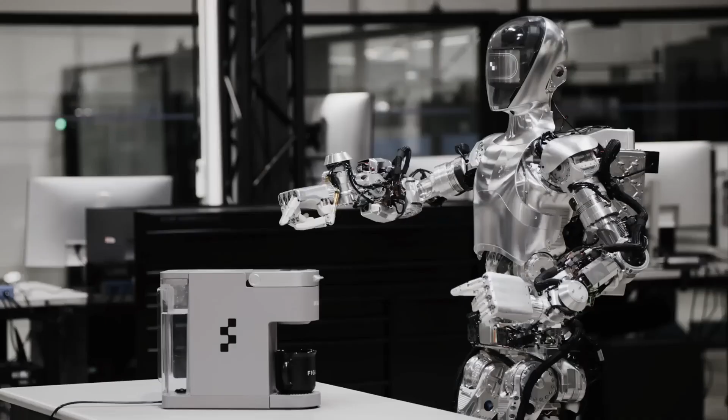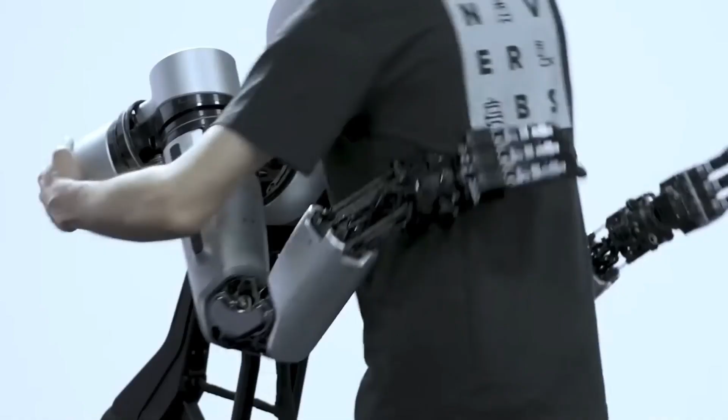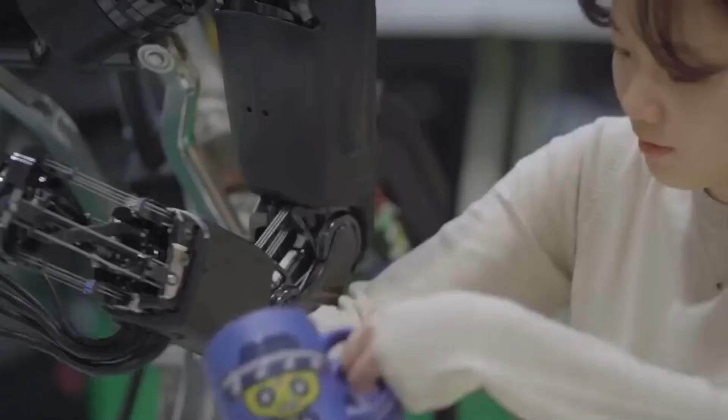The convergence of artificial intelligence and robotics has ushered in a new era of technological innovation, culminating in the development of human-like robots. These robots, often referred to as humanoids, are designed to mimic human appearance and behavior. With the advent of 3D printing technology, the creation of these robots has been revolutionized, allowing for more realistic, functional, and customizable designs. This video explores the future of AI and robotics, focusing on the development, potential, and implications of 3D printed human-like robots.

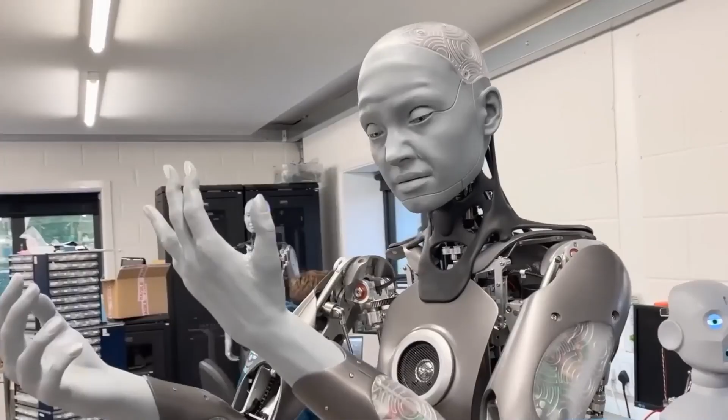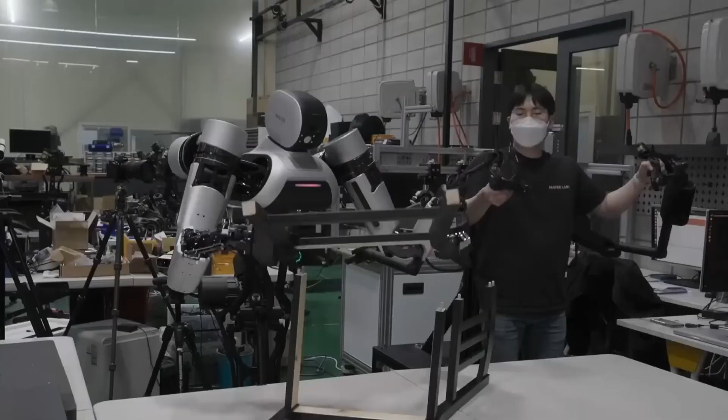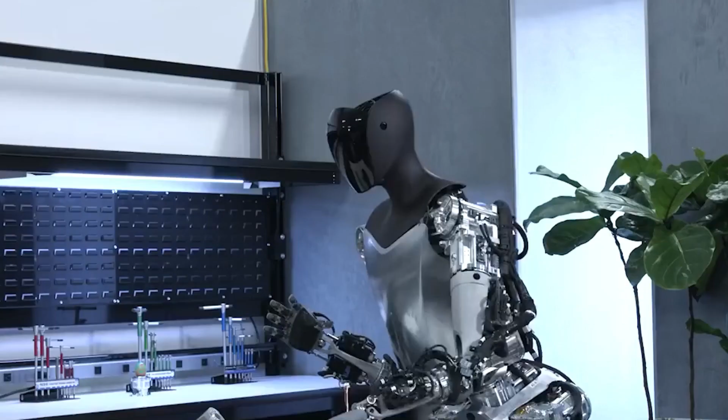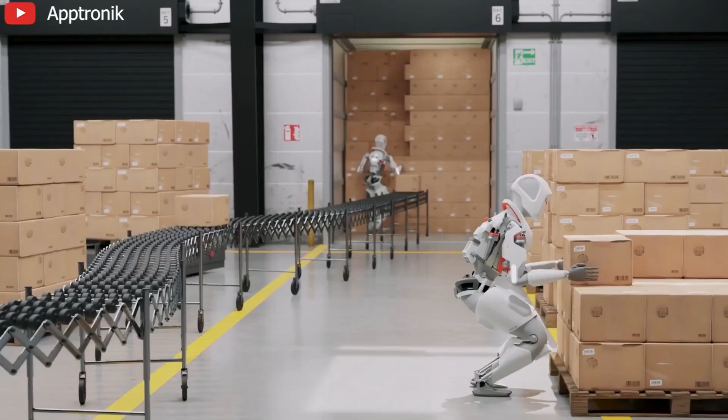The evolution of humanoid robots. Humanoid robots have evolved significantly in recent years, advancing from simple automatons to highly sophisticated machines. Initially, robots showcased abilities like basic walking and performing limited tasks. Today, advancements in AI have dramatically enhanced the functionality of humanoid robots, enabling them to understand and respond to human emotions, perform complex tasks, and learn from their environments. Modern humanoid robots can now engage in meaningful conversations, provide personalized assistance, and adapt to new situations.

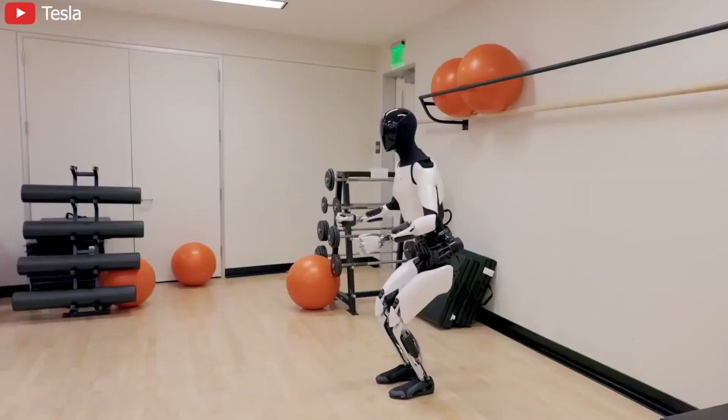The incorporation of 3D printing technology has further revolutionized their development, allowing for the creation of highly detailed and lifelike designs, including custom joints, facial features, and skin textures. This technology not only enhances the aesthetic appeal of humanoid robots, but also improves their functional capabilities, making them more efficient and adaptable in various applications.

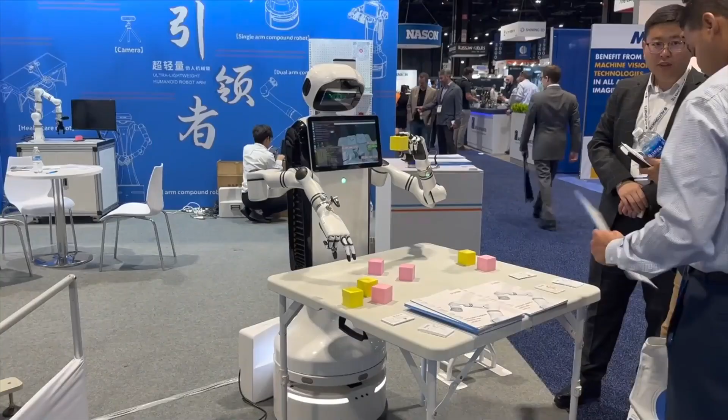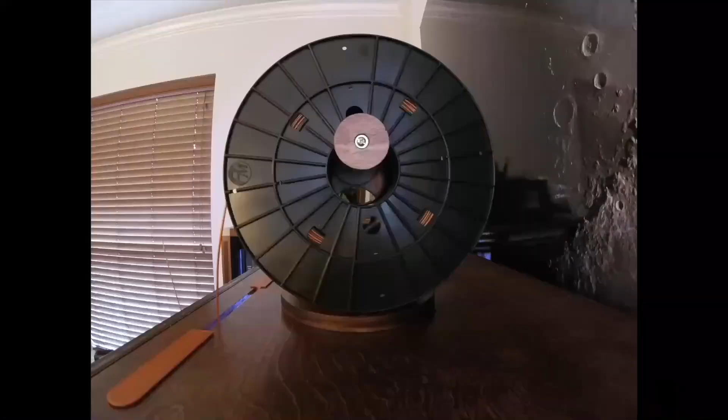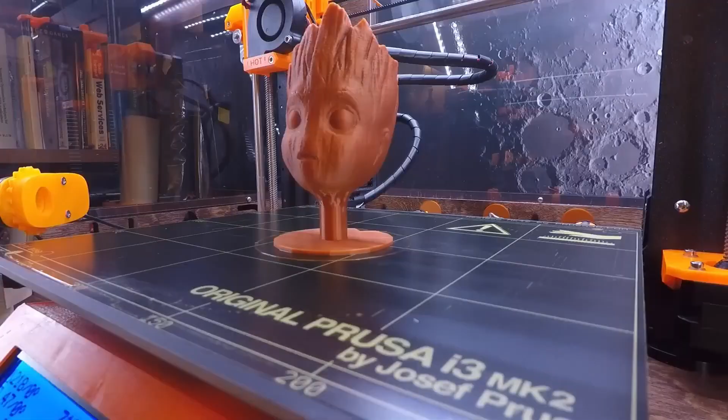The role of 3D printing in robotics. 3D printing, also known as additive manufacturing, has had a profound impact on various industries, including robotics. This technology allows for the creation of complex structures with high precision and efficiency. In the context of humanoid robots, 3D printing offers several advantages.

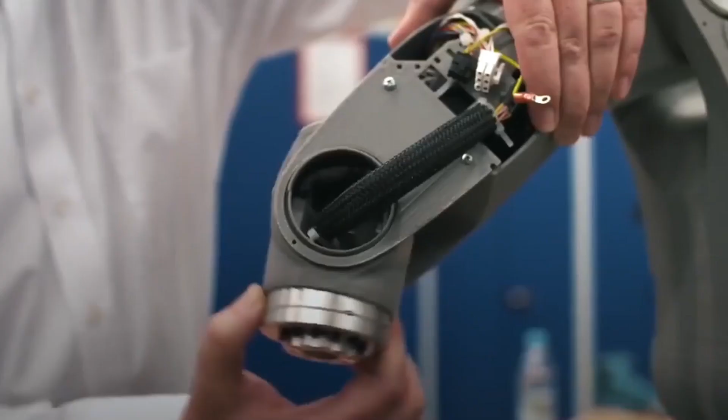Customization and precision are paramount, as 3D printing enables the creation of bespoke parts tailored to specific requirements, enhancing both the functionality and aesthetic appeal of humanoid robots. Custom joints, facial features, and even skin textures can be designed and produced with high accuracy, resulting in robots that closely resemble humans.

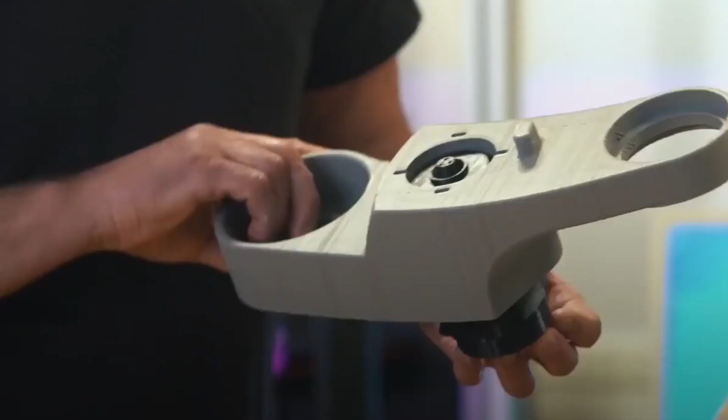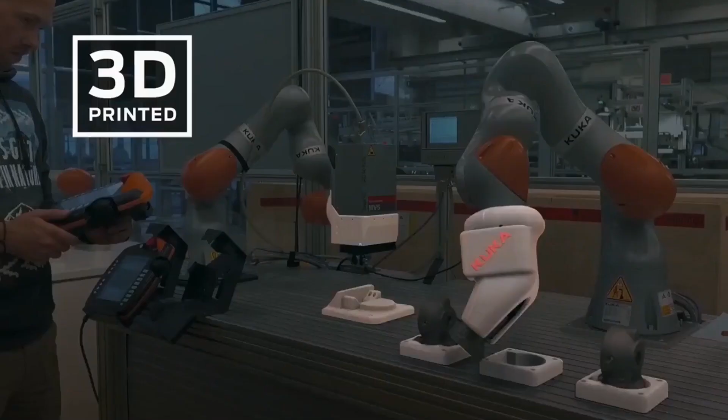The rapid prototyping capability of 3D printing significantly expedites the iterative process of design, testing, and modification. Prototypes can be quickly produced and tested, allowing for rapid iterations and improvements, which accelerates the development cycle and reduces the time to market. Additionally, 3D printing allows for the use of various materials, including flexible, lightweight, and durable options.

This material diversity enhances the realism and utility of humanoid robots, enabling the creation of components that closely mimic human tissues, muscles, and bones.

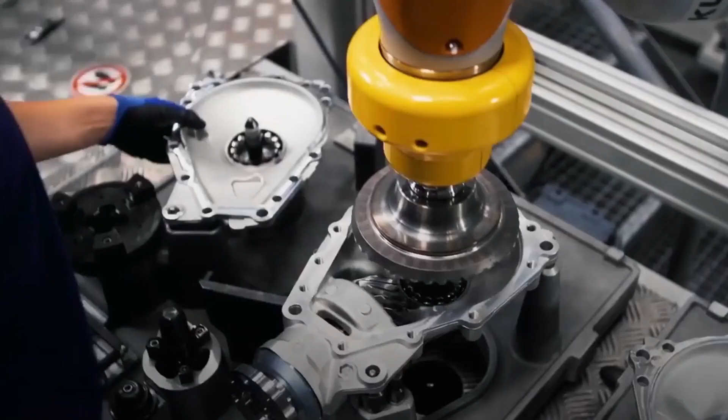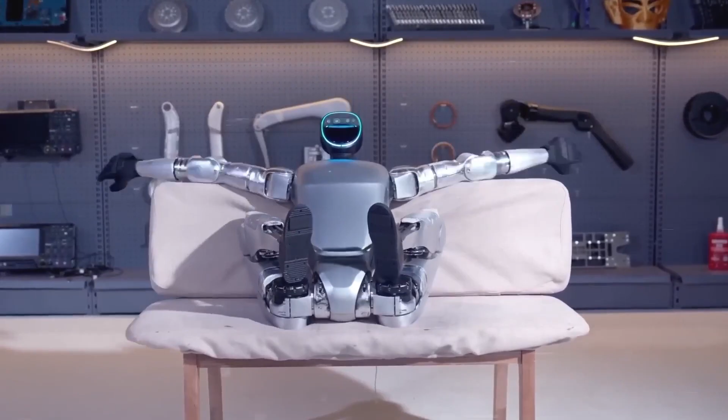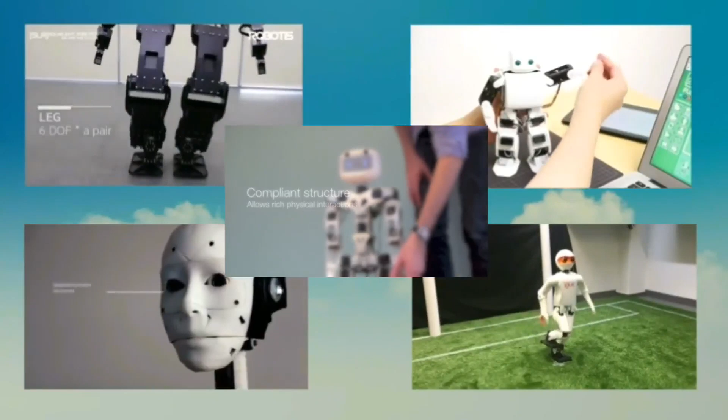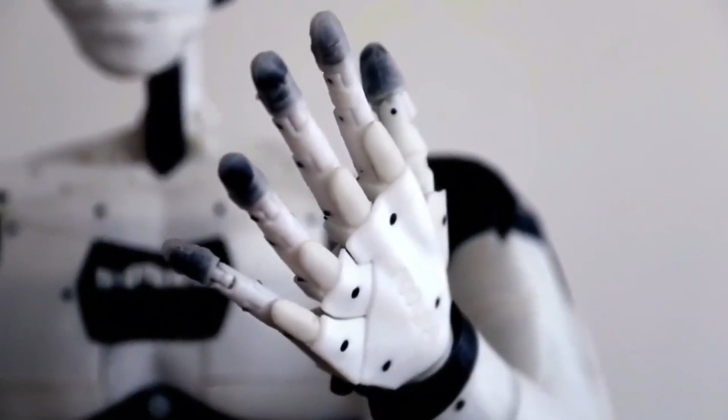Advancements in AI and their impact on humanoid robots. Artificial intelligence is the driving force behind the cognitive and functional capabilities of humanoid robots. Recent advancements in AI, particularly in machine learning and neural networks, have significantly enhanced these robots' abilities. Natural language processing, NLP algorithms, enable humanoid robots to understand and respond to human language with greater accuracy, facilitating more natural interactions and allowing robots to engage in meaningful conversations, provide information, and offer assistance.

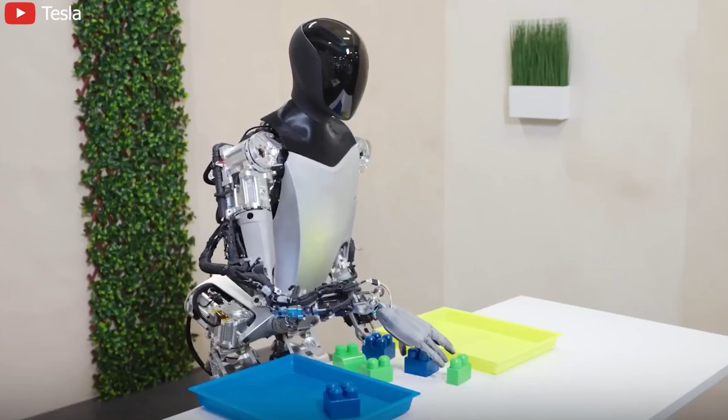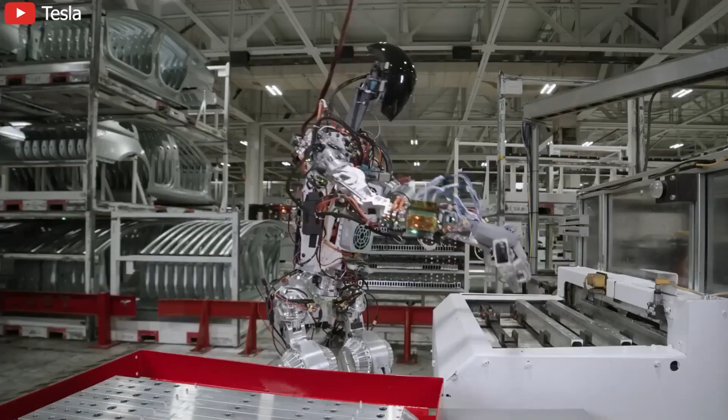Enhanced visual processing capabilities through computer vision allow robots to recognize and interpret visual data, enabling them to navigate environments, identify objects, and recognize people. These algorithms have advanced to the point where robots can understand complex scenes and perform tasks such as sorting and assembling objects. Additionally, AI algorithms now enable the interpretation of human emotions through facial expressions, body language, and tone of voice, allowing robots to respond empathetically and appropriately.

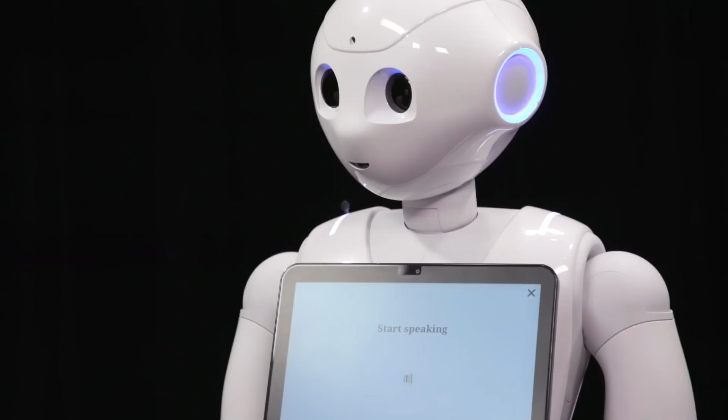This enhancement in emotional intelligence significantly improves their ability to interact with humans in a socially intelligent manner. For instance, robots like Pepper by SoftBank Robotics are designed to read emotions and adapt their responses accordingly, making them suitable for roles in customer service and healthcare.

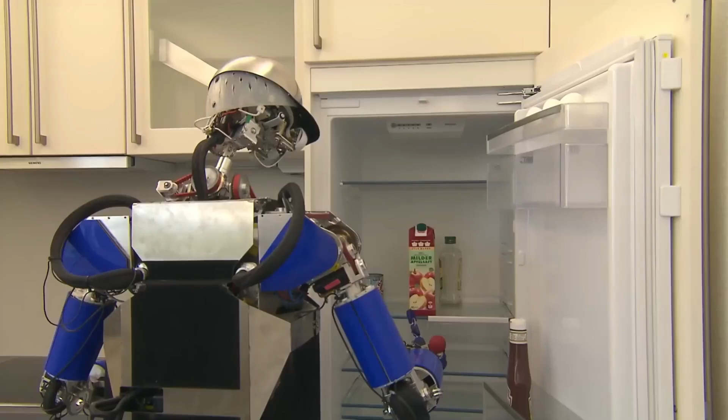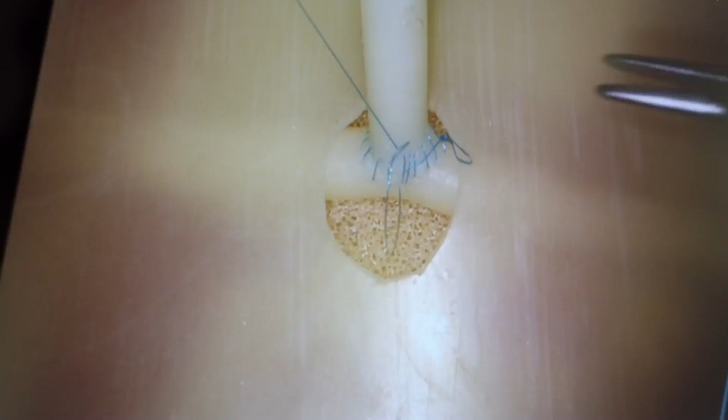Applications of 3D printed human-like robots. The potential applications of 3D printed human-like robots are vast and varied, spanning multiple sectors. Healthcare: advancements in healthcare are incorporating humanoid robotics to assist in patient care, surgery, and emotional support.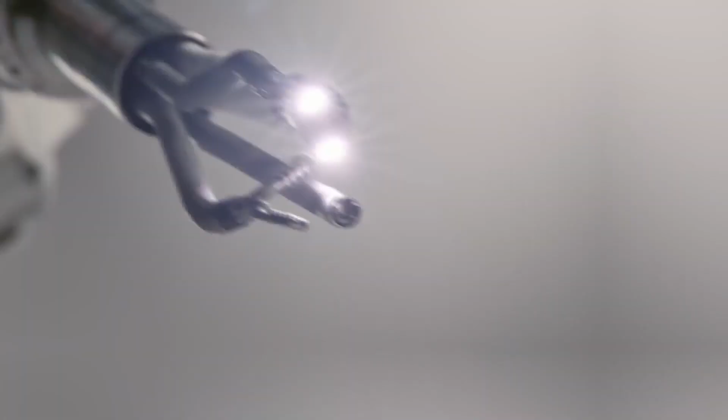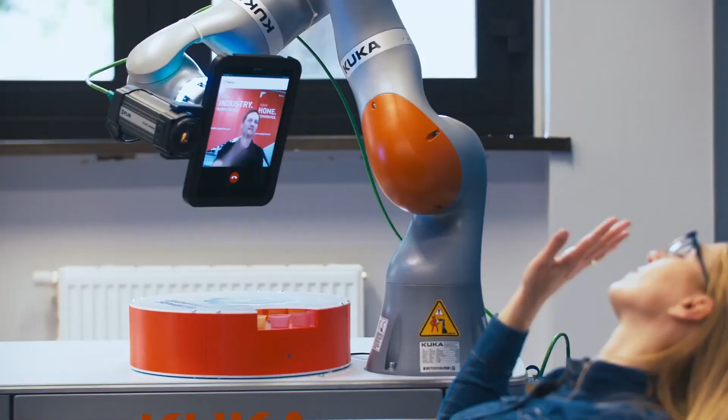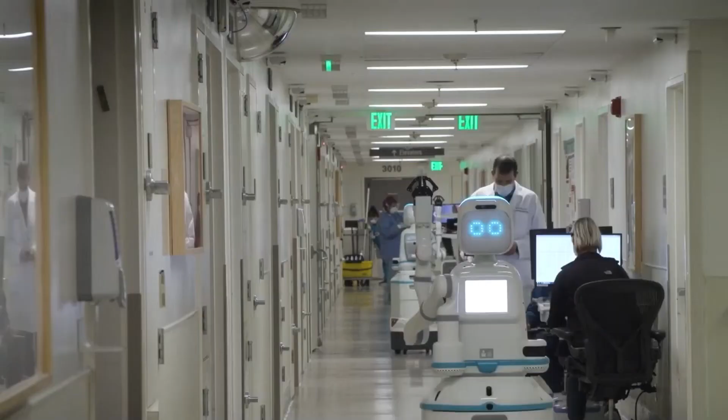Robotic surgical systems, exemplified by cutting-edge technology such as the da Vinci Surgical System, are transforming minimally invasive procedures, ensuring precise and controlled operations. Additionally, humanoid robots are aiding in patient care by monitoring vital signs, assisting with mobility, and managing medications. These robots, equipped with sophisticated AI, provide real-time health monitoring and support, enhancing patient well-being.

Education: robots can serve as teaching aids, offering personalized learning experiences and assisting in special education. They can help students with disabilities by providing tailored support and facilitating inclusive education.

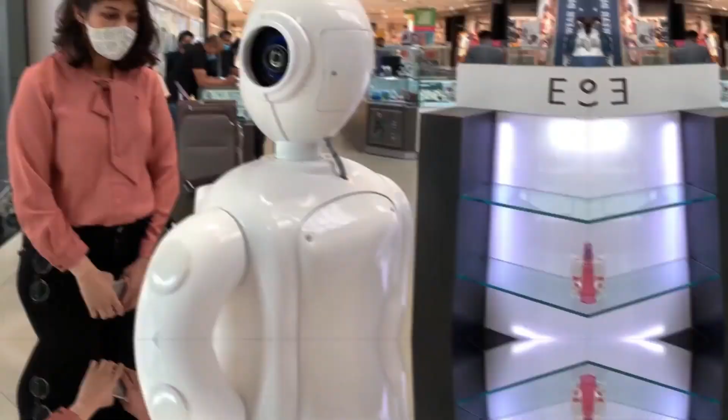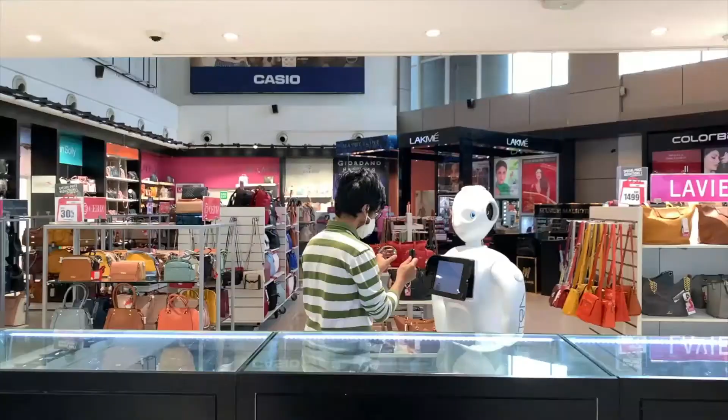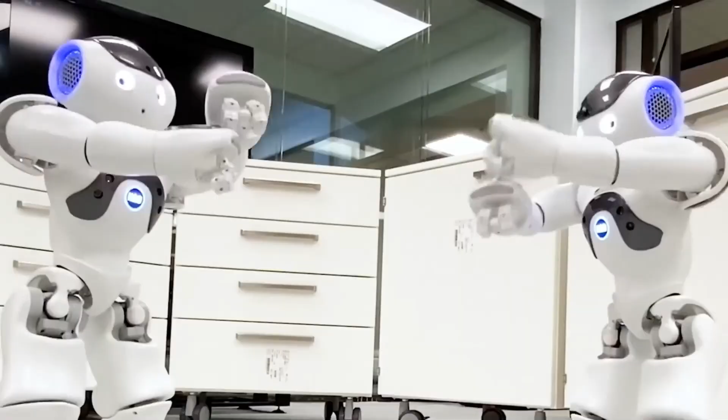Customer service: humanoid robots have become integral to enhancing customer experiences in retail and hospitality. Advanced robots like Pepper and newer models have been deployed in stores, airports, and hotels to greet customers, answer queries, and offer personalized recommendations. These robots use sophisticated AI to provide information, assistance, and entertainment, improving customer satisfaction significantly. They can handle routine inquiries and tasks, freeing up human staff to focus on more complex and nuanced customer service interactions.

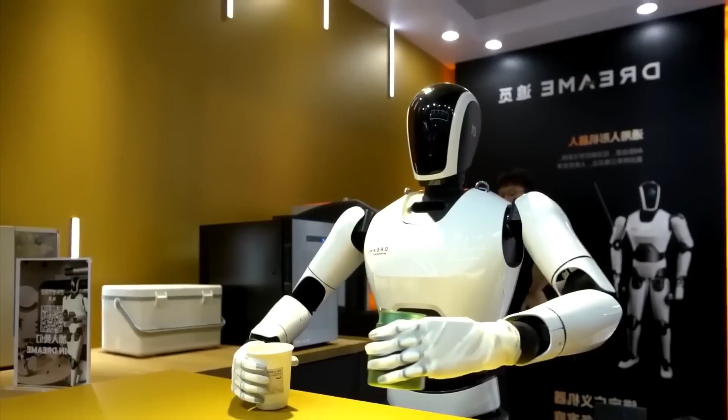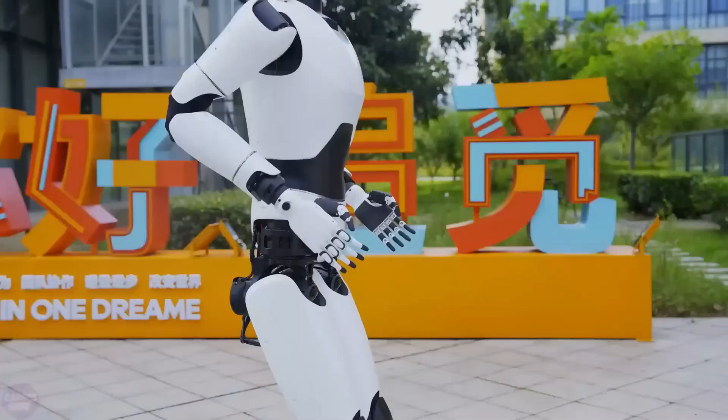Ethical and societal implications. The rapid advancement of humanoid robotics raises profound ethical and societal implications. Questions arise regarding the ethical treatment of robots, considering their increasing capabilities and semblance to humans. Concerns about job displacement and economic inequality surface as robots replace traditional roles in various industries. Moreover, the potential for misuse of AI-driven robots poses risks to privacy and security.

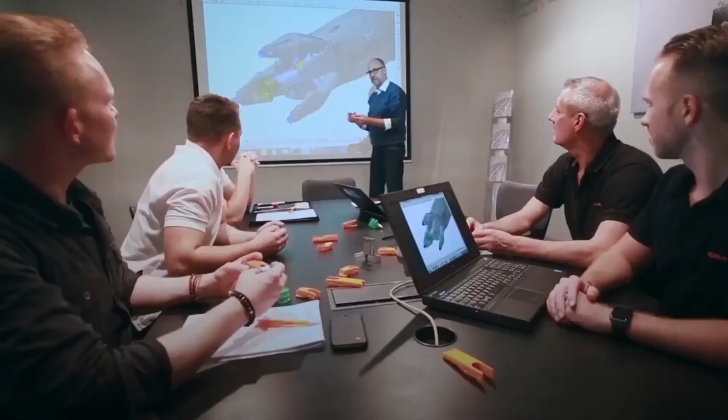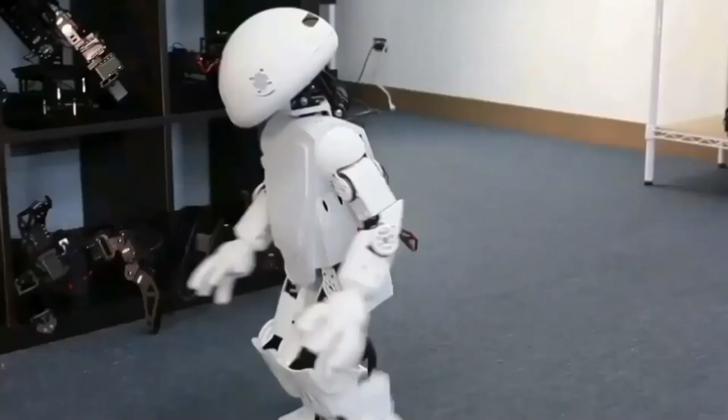Future prospects and challenges. The future prospects of 3D printed human-like robots are promising, with ongoing research and development poised to overcome current limitations and unlock new possibilities. Advancements in materials science, artificial intelligence, and robotics hold the potential to create more lifelike and functional robots that can perform a wider range of tasks.

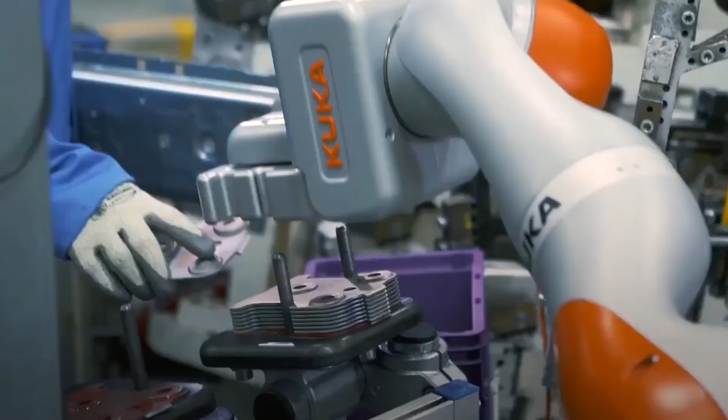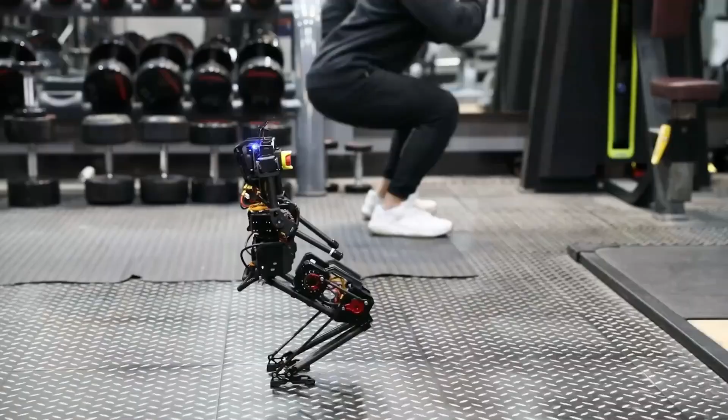However, challenges such as refining printing techniques for intricate details, ensuring durability and reliability of printed parts, and addressing ethical concerns surrounding their use remain. Overcoming these hurdles will be essential to fully realize the potential of 3D printed humanoid robots and integrate them effectively into various aspects of society.

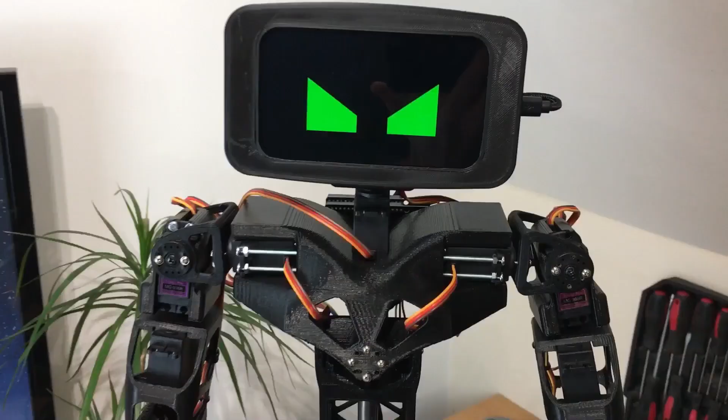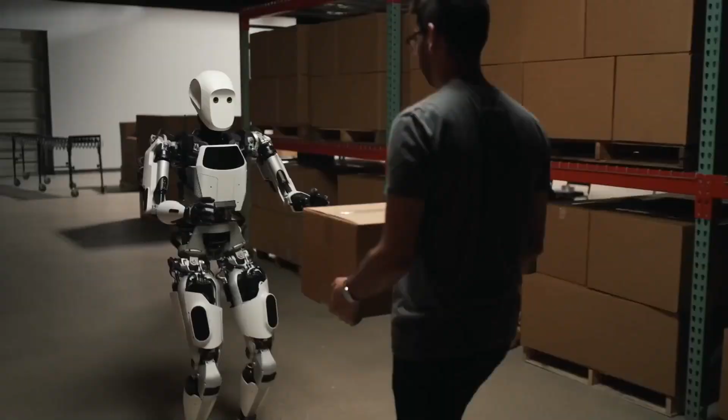The convergence of AI, robotics, and 3D printing technology has brought us to the brink of a new era in the development of human-like robots. We can harness the full potential of 3D printed human-like robots, creating a future where they coexist harmoniously with humans and contribute positively to society. The journey ahead is filled with exciting possibilities, and with careful consideration and thoughtful planning, we can ensure that the future of AI and robotics benefits all of humanity.